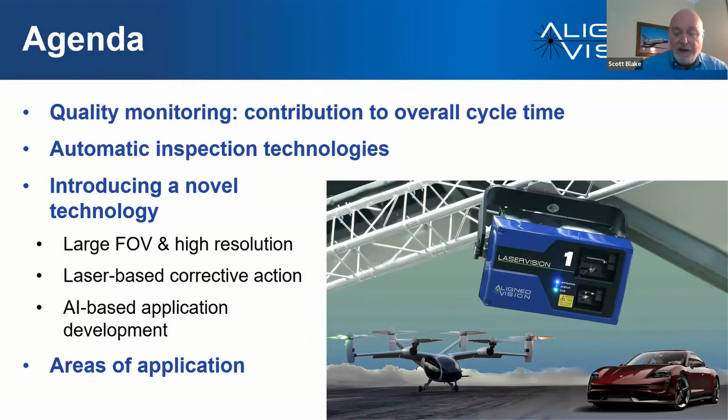Okay, good. I'm going to talk about quality monitoring and how much cycle time is involved with quality monitoring, a little bit about automatic inspection technologies in composites, and then I'll talk about what we're doing with a very large field of view and high resolution system that includes a laser projector to guide corrective actions. And the big news, especially from IMTS, is just how rapidly the ability of AI and deep learning are evolving to support these kinds of activities.

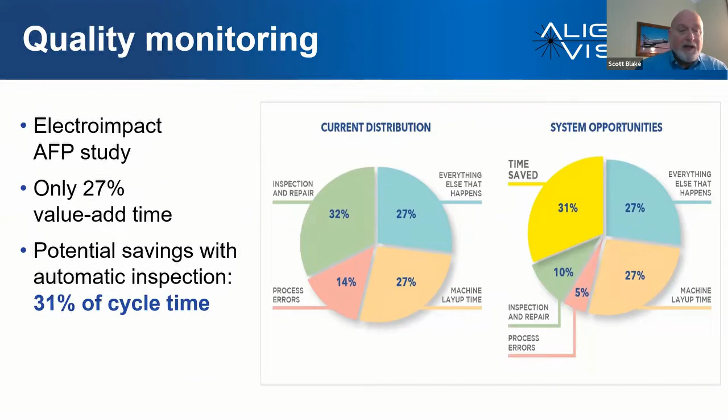Electroimpact did a study a few years ago with Boeing, and it turned out that only about a quarter of the cycle time in production was adding value. And a large portion of the non-value adding cycle time was in inspection and repair. Our goal is to bring this down as close to zero as possible. The challenges are we need really high quality inspection images in large, complex structures. We want to not disrupt production, and we want to enable rapid resolution of problems that are detected with automatic inspection.

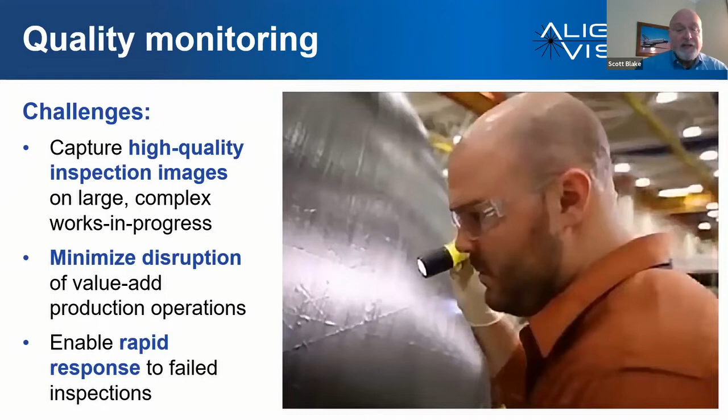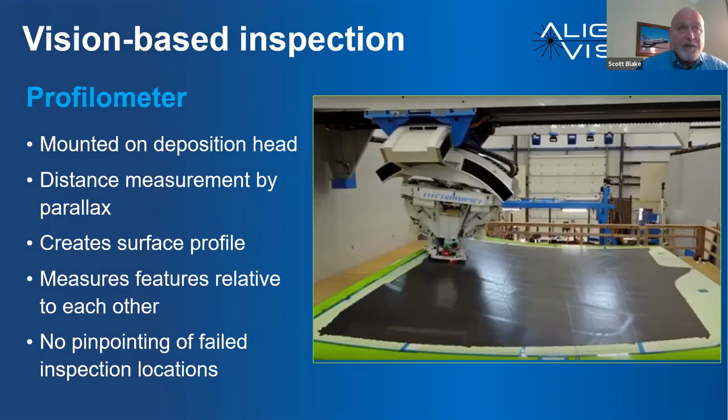Right now, the principal method of inspecting automated composites uses a profilometer, which is mounted on the deposition head. It's measuring distance to the surface by parallax and creating a surface profile. It's not doing an absolute inspection; it's looking at things relative to each other or where the deposition head is. And when a problem is found, it's often difficult to know where to go physically on the part to fix it. On our largest parts, the envelope's almost 100 feet long, and you're looking for laps or gaps or twists or missing material or incorrectly located material that can be less than 0.5 millimeter.

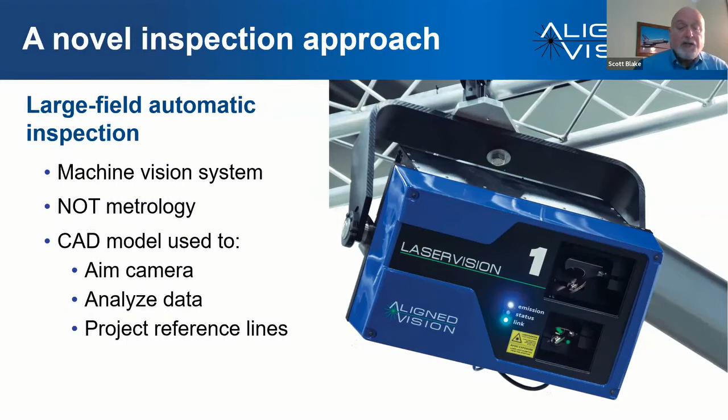What we have is this machine called LaserVision for large field automatic inspection. It's machine vision, not metrology. We are not creating point clouds. We're not using the laser for the actual analysis. We're aiming a very high resolution camera with mirrors, and that allows us to multiplex a very large field. The data that we collect comes with a photogrammetric transform, which allows us to relate each pixel in our captured image to a region on the model surface. And then after we've analyzed the images, we can project guidance with the laser projector to show where additional inspection or remediation might occur.

By doing machine vision rather than point cloud metrology, we're much, much faster than metrology. A long inspection cycle for us is about a second. And as I said before, each pixel on the 2D image is dimensioned and related to a region on the 3D model surface. We're essentially doing a gauging function. In the image on the right here, we've dropped digital calipers onto the ends of these tows, and we can tell where they are relative to each other, how wide the gaps are, all kinds of other attributes. That image is an example of a highly magnified, high resolution image that was taken from 10 feet away, and those tows are 1/2 inch wide.

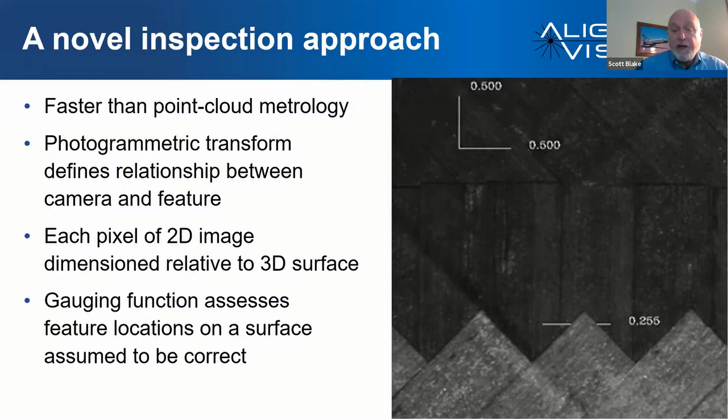On the Boeing 777X, this is an example of how our machine's used on the production of very large structures. In this case, this was a tryout wing spar. You can see one of the laser vision machines mounted at the apex of that gantry, and the pyramid shows the field of view. So we have a long standoff distance. We don't conflict with the deposition head. We can very rapidly aim the camera's field, and we have a giant lens, much bigger than you would have on a smart camera, that collects lots of light, which results in very sharp, clear, high-resolution images. And in the bottom right in this image is, once again, tows taken from 10 feet away.

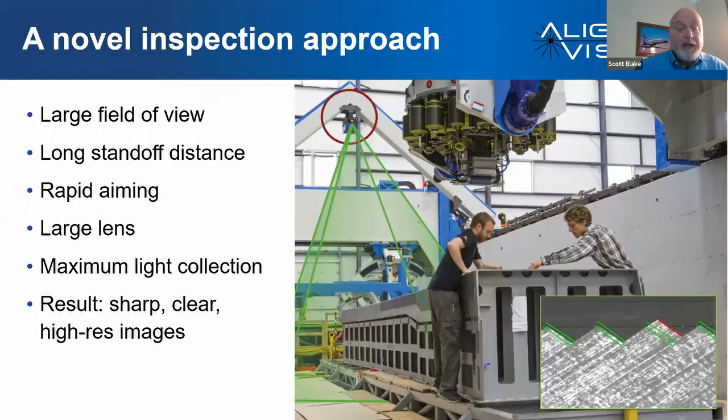The photogrammetric transform allows us to plot tolerance bands from the nominal into the as-built image to see if the starts of the course are where they're supposed to be. And when we analyze the image, if we don't find what we're looking for, we point it out, as in the third tow in from the left, and we can use the laser projector to say, hey, this tow is not right. So we're effectively providing gigapixel resolution over large fields, 2, 3, 4, 5 meters on a side.

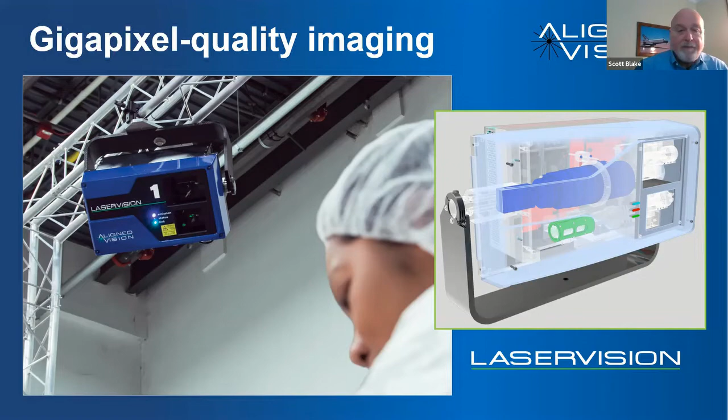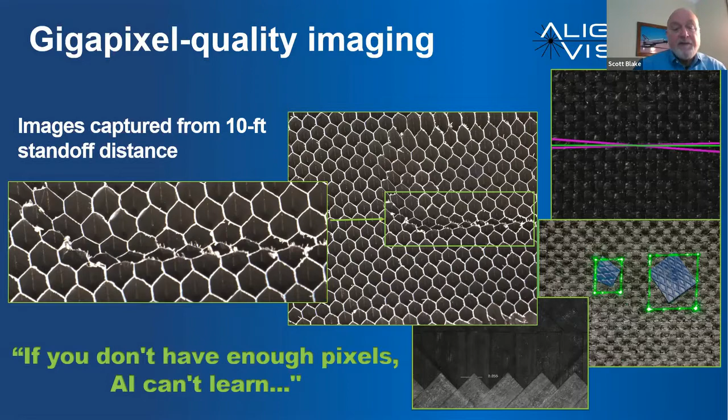We can actually create point clouds of orientations if you really wanted to look at how your material is behaving through an entire surface. The bottom picture on the right shows some FOD that we've detected in an image, and we're drawing boxes around it with our laser projector. And one of the great quotes about doing imaging, especially in large fields, is if you don't have enough pixels, AI can't learn. And we can provide images with tremendous resolution, lots of pixels in any area in a very large field.

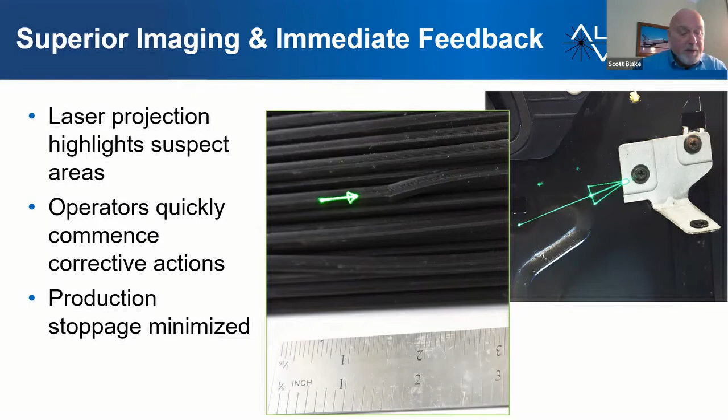As I said, each show I go to, I'm impressed at how rapidly the applicability of artificial intelligence is accelerating. We are reaching a point where analysis algorithms for any attribute can be developed very, very quickly, much faster than the old rule-based MATLAB kinds of machine vision algorithms. You capture images of good and bad things, you tag them, you treat them with a tool that develops classifiers, and you can build essentially intelligence for analysis, for automatic inspection for any kind of application.

And our system supports running these models. We develop them. We have partners who develop them. We have customers who develop them. A lot of manufacturing research facilities are associated with universities, and universities are very big on AI and deep learning. And these algorithms get put on a special kind of processor. We use an NVIDIA Jetson. It makes the analysis models agnostic, and it also avoids all the kinds of problems you have with variations in the Windows operating system.

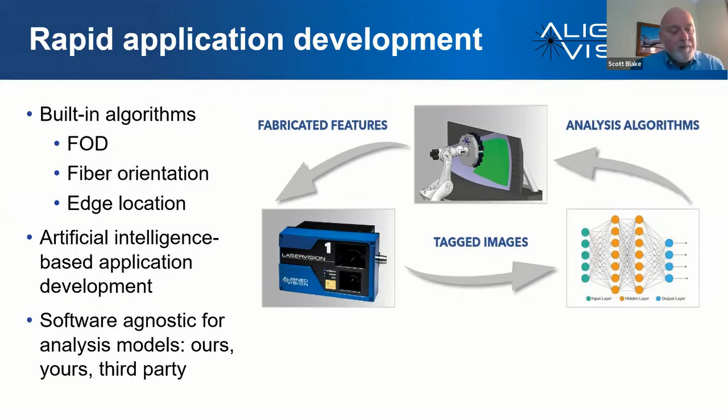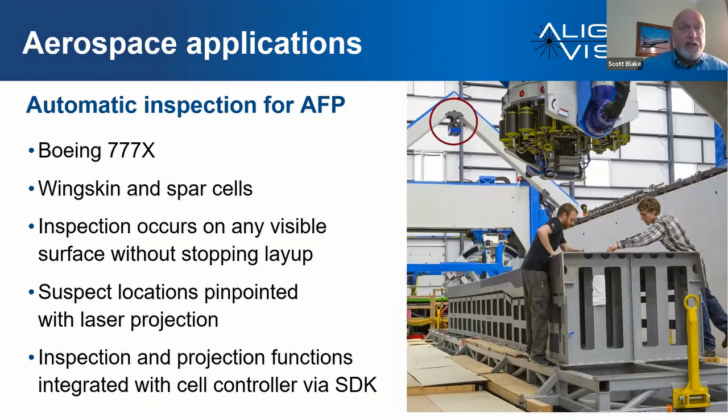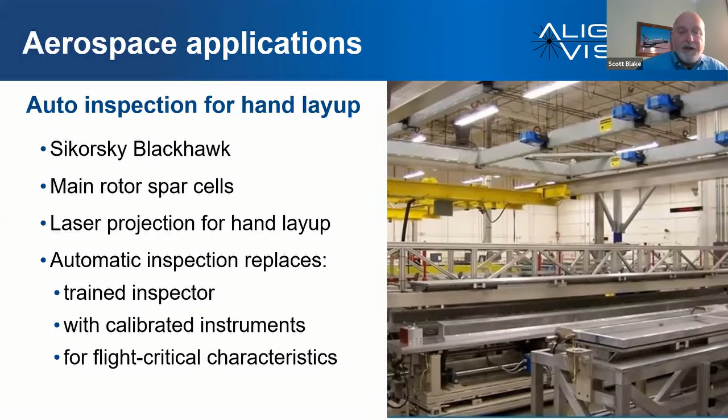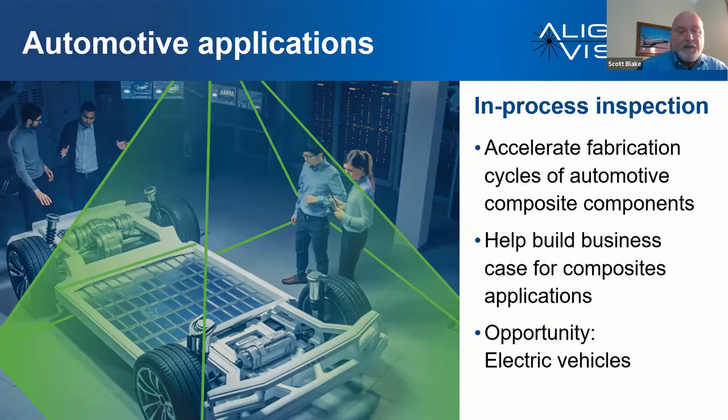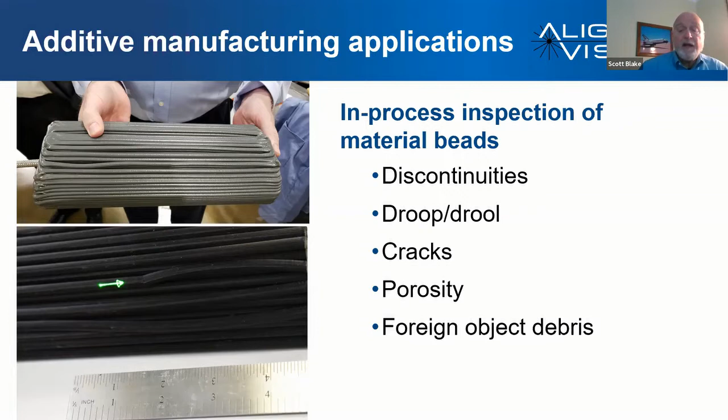Doing a lot of work in automotive, same kind of thing. We can fit most of a chassis into the field of the system. And we can even read stamped numbers on axles and things like that. We're doing a lot of work with electric vehicles and the battery trays. In additive manufacturing, we can see a lot of things that you don't see easily with metrologies, different kinds of discontinuities, droop and drool. We can sense cracks very well. Cracks are much easier to sense in images than they are in point clouds. We can look at porosity and FOD.

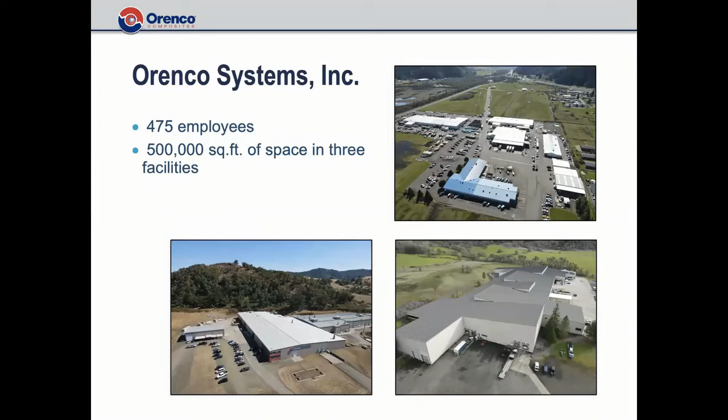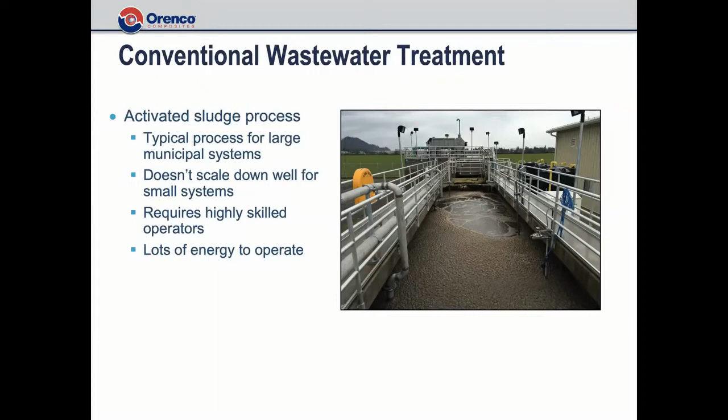So in the 1980s, Orenco pioneered the development of packed bed sand filters for small scale wastewater. And while sand filters do provide the reliable, low cost, low energy, and low maintenance solutions inherent to packed bed filters, they require significant on-site construction and land space, and repairs can be expensive, particularly if a system is abused or overloaded.

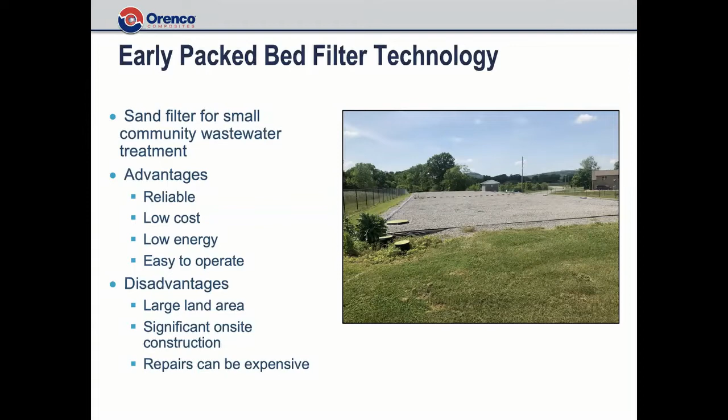So in the 1990s, Orenco developed a newer packed bed treatment technology called AdvanTex that utilizes a textile media housed in a factory-built fiberglass vessel. In addition to the inherent benefits of a packed bed filter, AdvanTex allowed for a fully assembled factory-built unit that could be dropped in the ground, minimizing on-site construction and land space, and simplifying both design and system operation and maintenance.

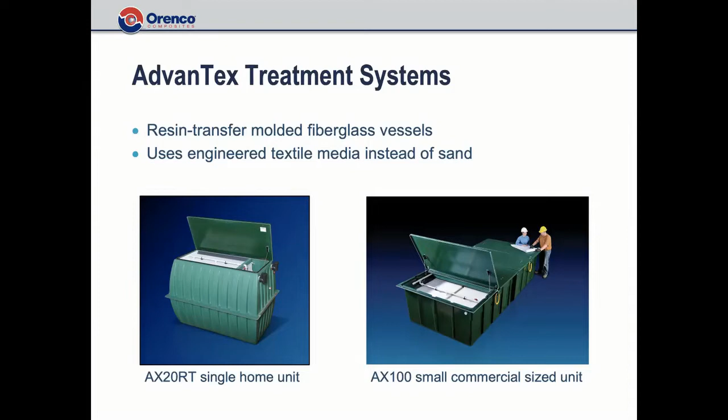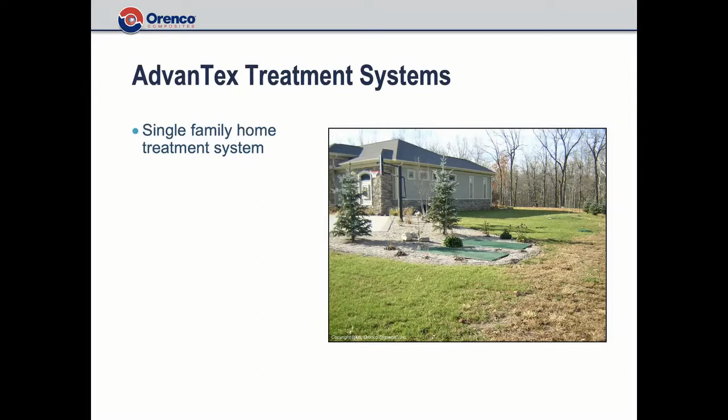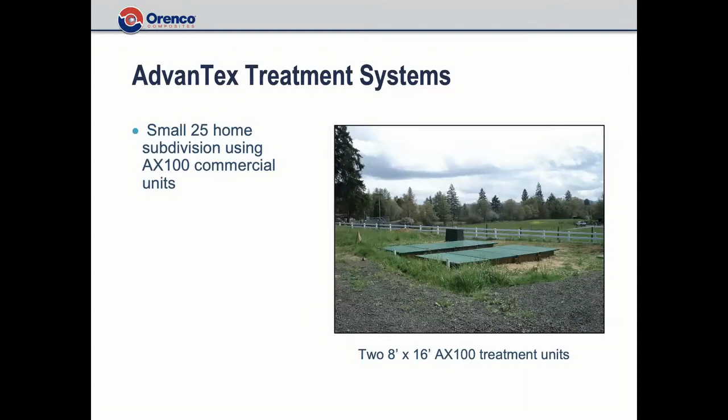Here's the larger AX100 commercial unit. This is a small subdivision, 25 homes, with 2 of these 8 by 16 foot treatment units. This RTM'd AX100 unit really limited the practical size to around 30,000 gallons per day.

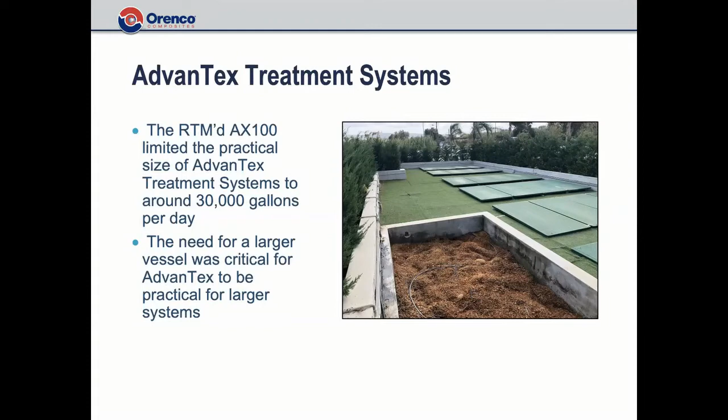So it became readily apparent to us that in order to make AdvanTex practical for much larger systems, we needed to develop much larger vessels. Fortunately, during the early 2000s, we had been developing in-house vacuum infusion capabilities, and specifically our interest was in developing foam core web stiffened structures.

We were using at the time TYCOR reinforced foam core, which I'm sure a lot of you know is not commercially available anymore. Early on, we actually developed what we felt was a stronger, better wrapped foam core rather than the TYCOR.

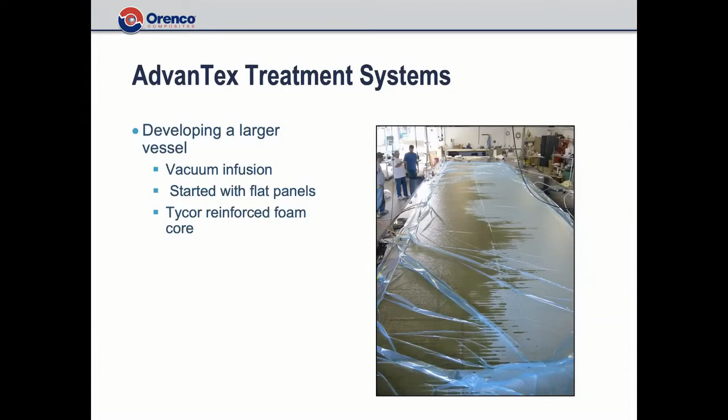So while these panel built tanks were lightweight and strong, they were really labor intensive, as you can see, involving multiple infusions and significant labor to bond these panels together.

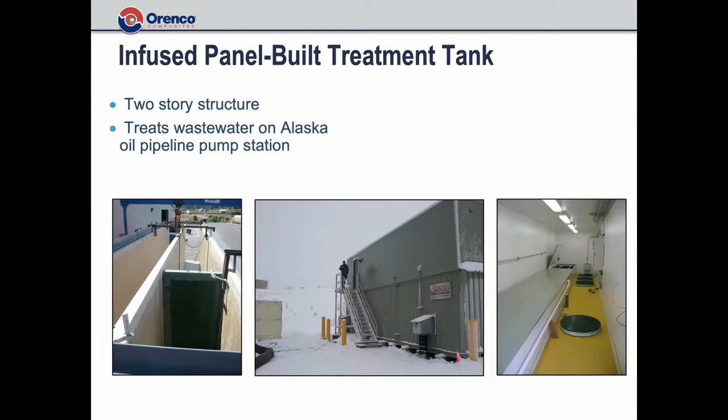Our goal was to vacuum infuse these large rectangular tanks in a single piece with no seams and no joints. It was a pretty big leap for us going from simple flat panels molded on a flat table to a full rectangular five-sided tank, so we spent some time figuring out how to infuse up a 10-foot vertical wall. Surprisingly, we found ways to do this in just a few weeks of testing.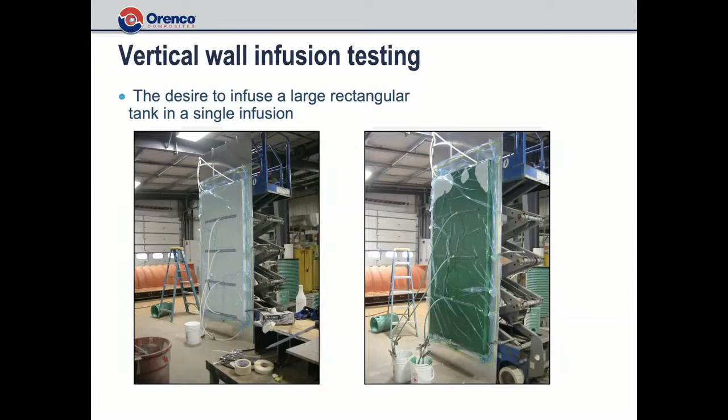You can see here on the left, we've got a panel ready to be infused with multiple injection points. We actually learned that we could infuse up to 12 feet in height with just a single injection point near the bottom.

So just in a matter of months, we were able to go from infusing flat panels to these large single-piece rectangular tanks. These large tanks enabled prefabricated turnkey Advantex treatment systems on a scale not previously attainable. These large vessels, called AX-Max treatment units, provide the quality of a factory-assembled product and fast deployment for municipal scale systems, for communities up to a few thousand people.

They also allow for system scalability, an important feature for deferring system costs as a community grows. With activated sludge, oftentimes they need to build out the system for 20 years of potential growth, whereas our Advantex systems can be scaled and built basically by adding treatment units.

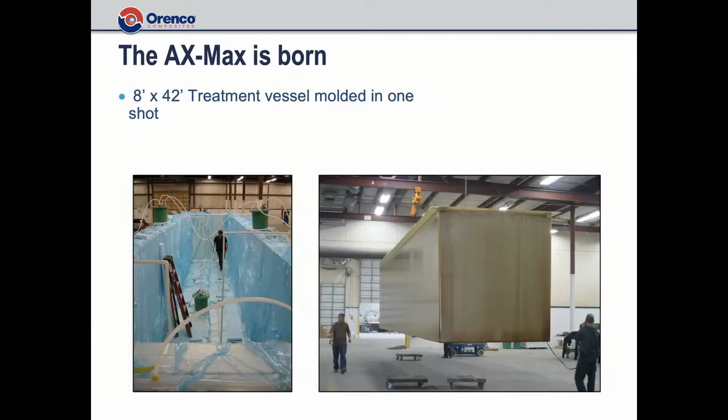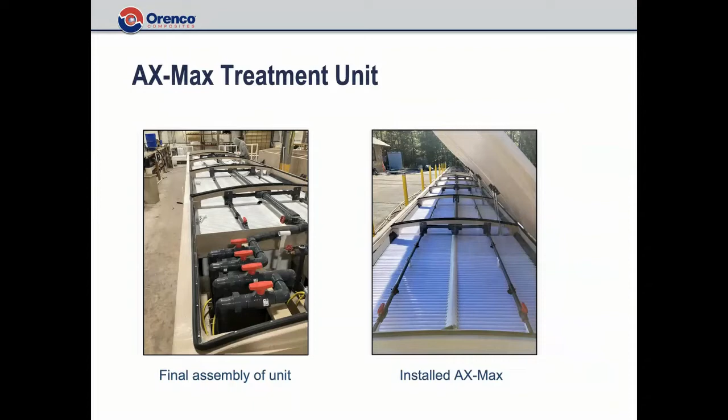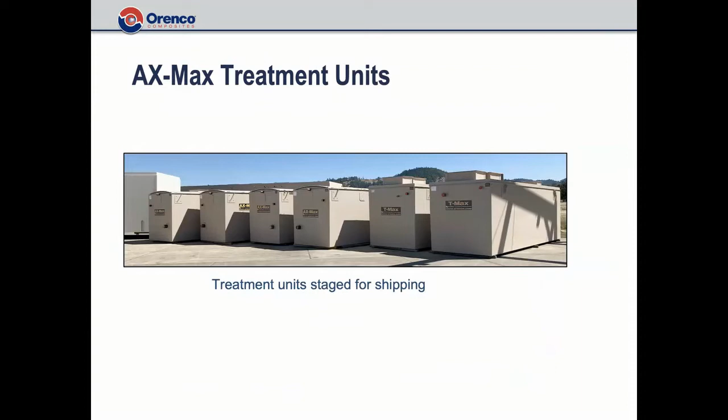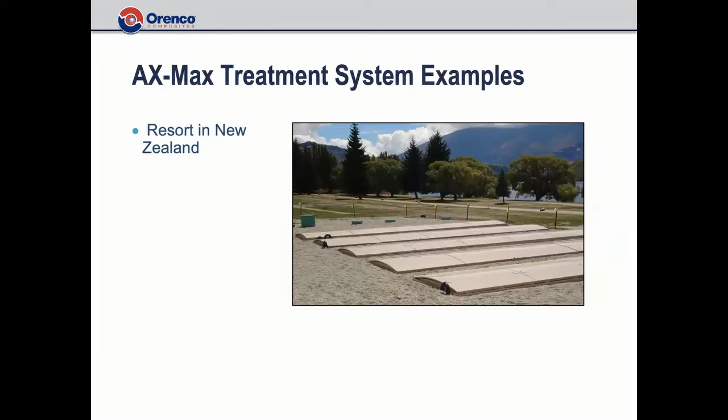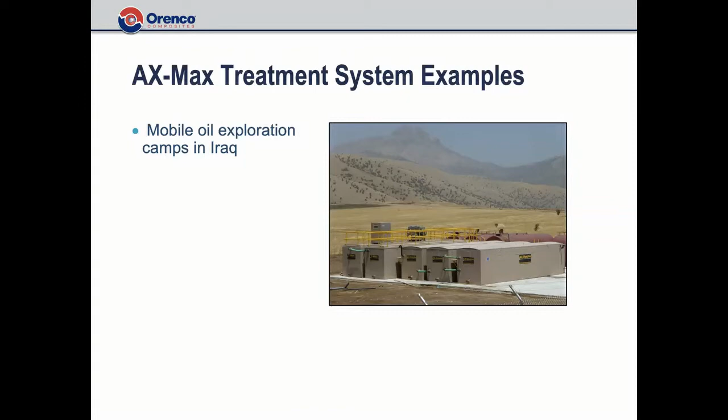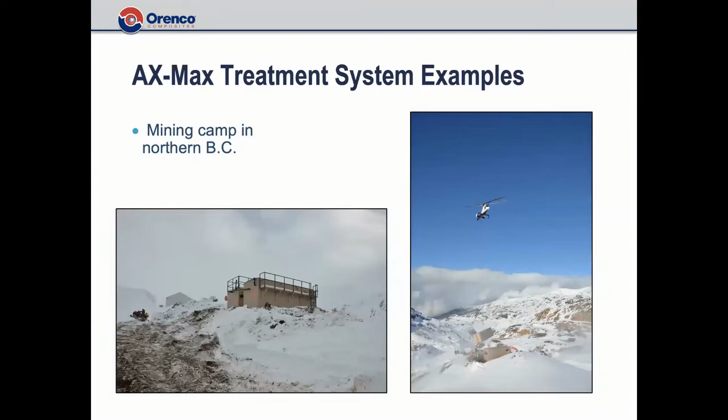With our success in vacuum infusing these large rectangular vessels, it was clear to us that there are significant opportunities and value for the use of these structures for many other applications and industries. So we now build tanks and buildings for a lot of other industries. Our largest mold right now can produce a tank or a building that's 12 feet wide, 50 feet long, and 12 feet tall. Some of these things weigh over 30,000 pounds.

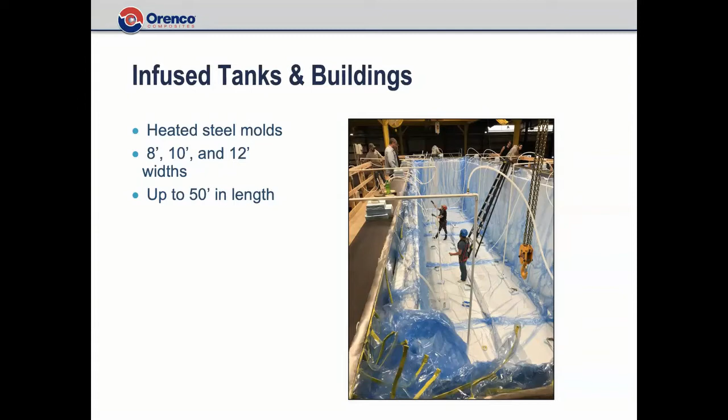This picture here on the right has 8-inch thick walls. It's a tank that's going to be completely buried underground.

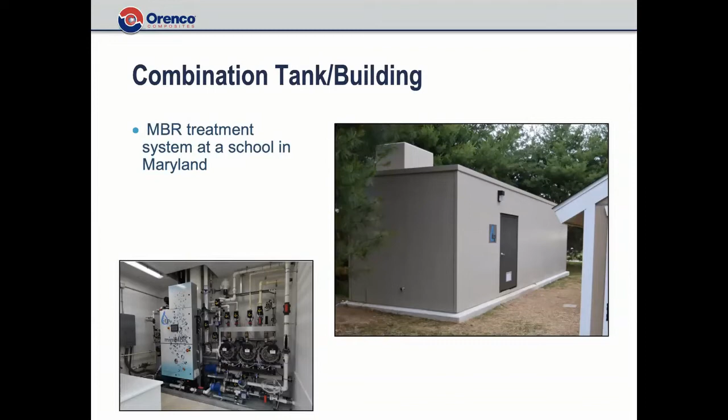Here's another kind of combination building and tankage. Again, the main structure is infused in one piece, and of course it's got control rooms and tankage and windows. This happens to be for a selenium treatment at a power plant.

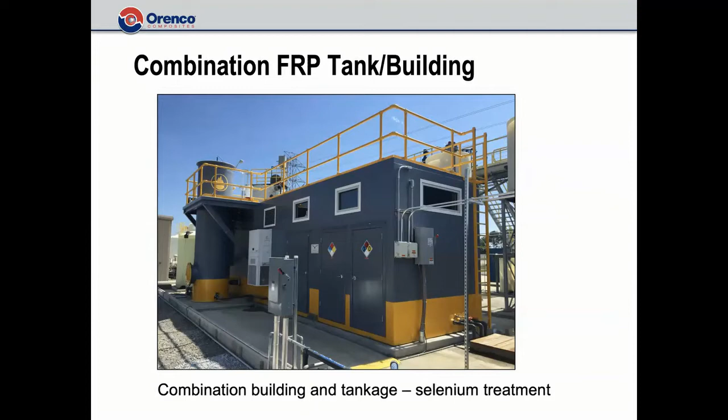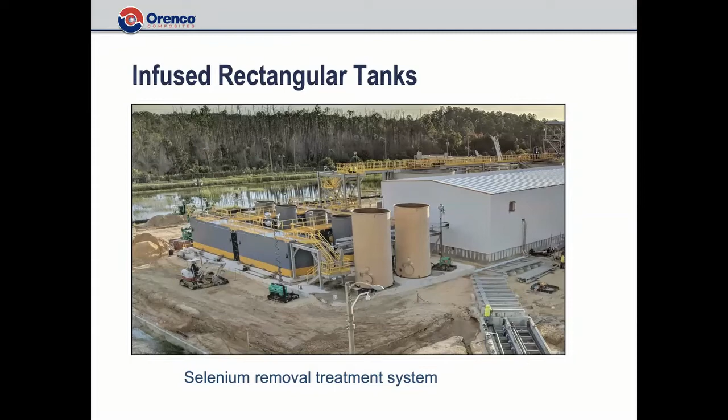Here's a much larger version of a selenium removal treatment. You can see those gray and yellow colored tanks — those are all vacuum infused structures. These happen to be filled with an activated carbon that's used in the selenium treatment system process.

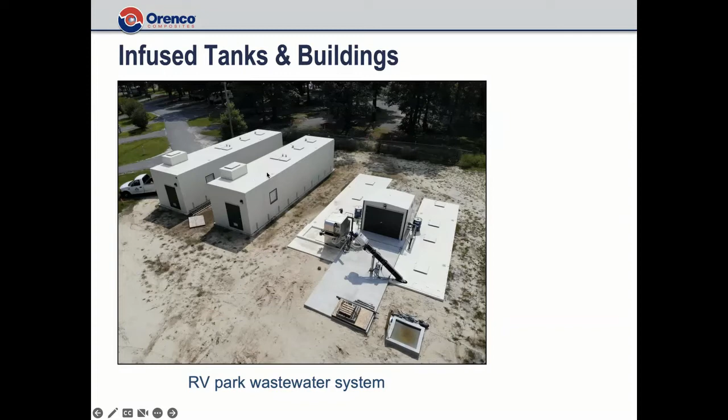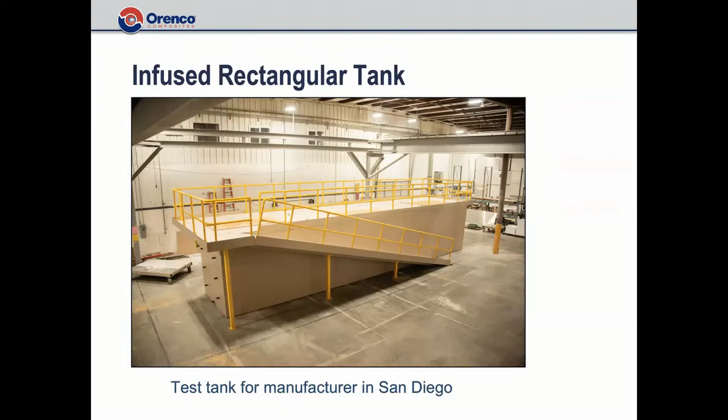Another example, this is in our factory, but it went to a manufacturer in San Diego for some sort of test tank. They take equipment and drop it down through openings into a tank of some sort of liquid. We also produce buildings the same way.

If you take one of our tanks and turn it upside down, you kind of have a building, although the bottom of the molds for buildings have a minor slope. This is a 2-room, 10 by 30 controls building. This actually went to a Frito-Lay plant.

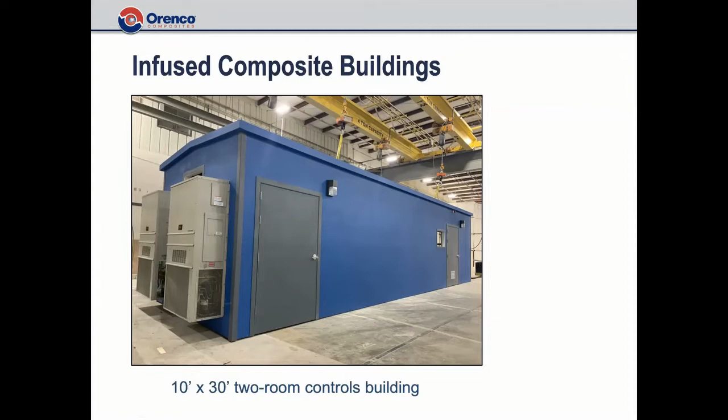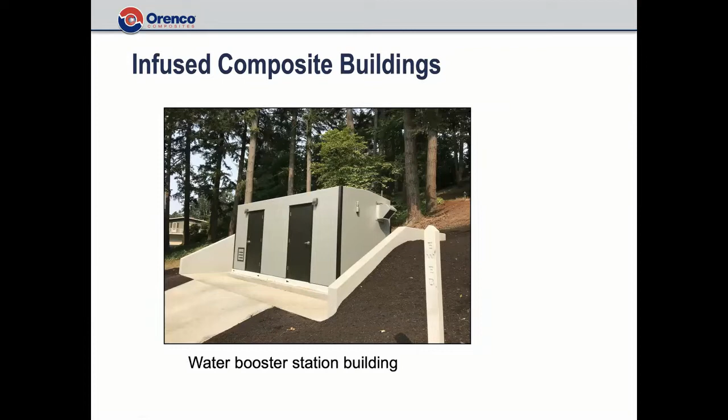Some other things we've leveraged with our web stiffened structures. This is a 105-foot diameter concrete tank we designed. It has a bunch of 10-foot wide panels, some up to 55 feet long, suspended by steel trusses.

This was a chicken processing wastewater tank, and this community kind of grew up around the outside of it. You can see beyond this tank there's an elementary playground, and this is full of chicken wastewater, and it really stunk.

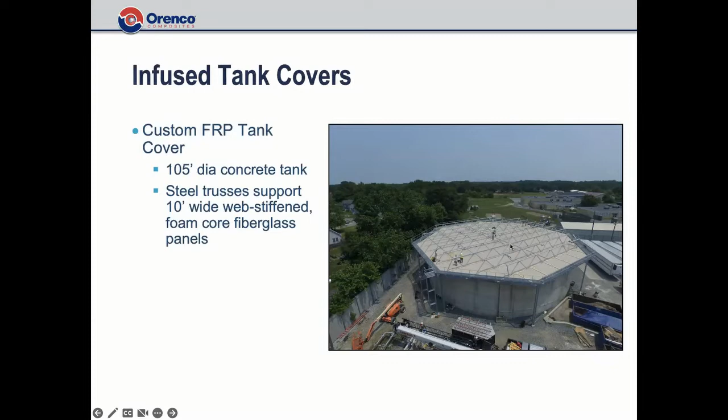We've started building vacuum infused bridges based on InfraCore technology. We have a North American license to produce bridges, lock gates, and other structures based on InfraCore technology, and there are now over 1,100 of these bridges, primarily in Europe.

Here's an example of actually a traffic bridge built on InfraCore, and here's a pedestrian bridge on the right.

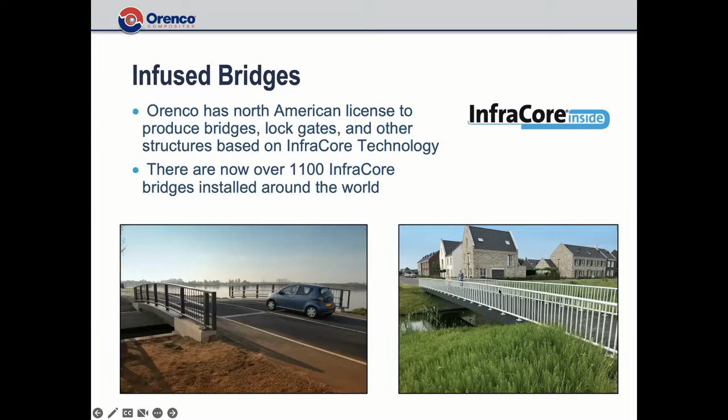Just a really brief rundown on InfraCore. It's kind of based on an I-beam concept. If you have a steel I-beam, it's optimized for strength, obviously. So with the InfraCore technology, basically we're taking glass fiber and

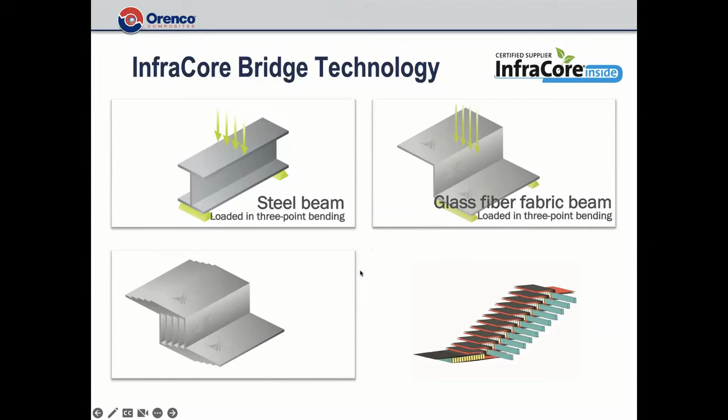putting it in the shape of a beam, but it's put together in this fashion, much different than conventional wrapped foam web stiffened technology like we use for making our tanks. The reason this is so important is that it gives a robust sandwich structure that's damage tolerant and prevents crack propagation.

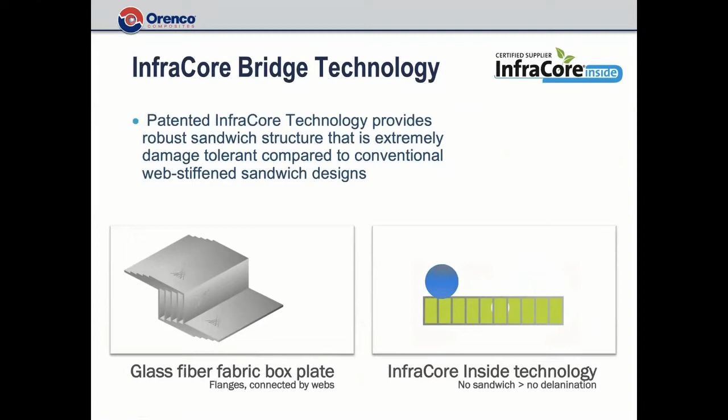The last couple of things: we've actually converted a lot of our resin transfer molded parts to a DCPD reaction injection molding process. This is an example of a tank. It's molded in 2 halves and then bonded together.

This is one of our high volume wastewater pumping systems for collection systems. We do both collection and treatment. We've just been talking about treatment vessels, but we also do a lot for pressure sewer pumping systems.

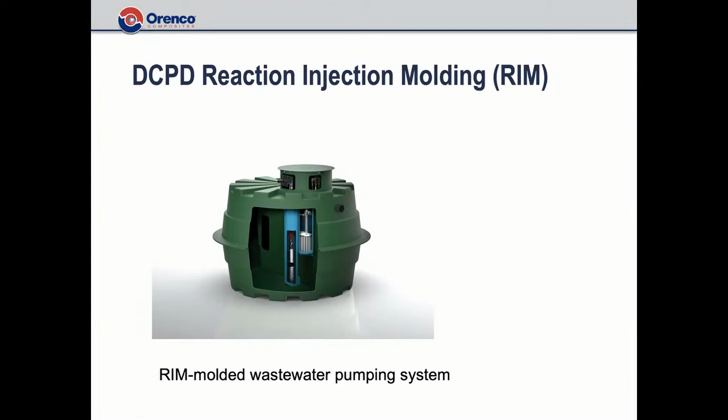Here's an example of one of our aluminum molds in a horizontal press. This particular part is a 185-pound part. It's injected in about 50 seconds with about a 10-minute button cycle time.

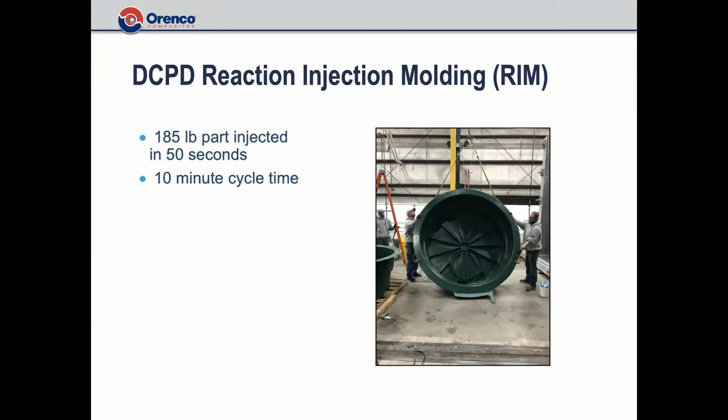And that's it for my presentation. Like Dale said, I'd be happy to take any questions.

Thanks, Eric. None, we'll see if one comes up during our little Q&A here that you and I'll have.

What kind of resin system? I know DCPD is an unreinforced system, but for the fiberglass reinforced systems, is that mostly vinyl ester for corrosion resistant purposes, or are there other resin systems you're using?

So we use isophthalic resin primarily for most of the water and wastewater applications. We've done a lot of C581 testing to show it's more than adequate for most municipal wastewater. However, a lot of the systems we do, like the selenium treatment tanks you saw, those are all vinyl ester. So we do use vinyl ester for a lot of industrial applications.

What's the highest temperature any of these see? Some of the vinyl ester tanks may get up to 200 degrees Fahrenheit, usually not on a continual basis though. Most municipal wastewater systems won't see over 100 degrees Fahrenheit. The bugs in the treatment system will fail miserably if it gets too hot.

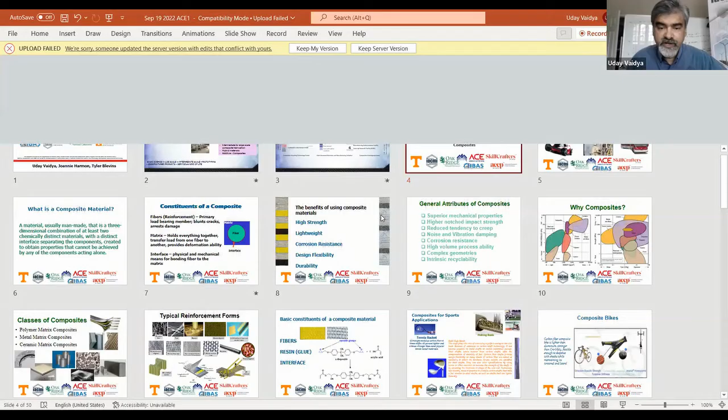We also go over IACMI as an institute with the participants and generally get them oriented about what to expect. The workshops that we run typically serve anywhere from 25 to 40 participants. These are students from community colleges, even high schools, as well as college students, and teachers, some of whom take the information back to their schools and implement it in their classrooms in their personalized settings. So that's really the background of ACE.

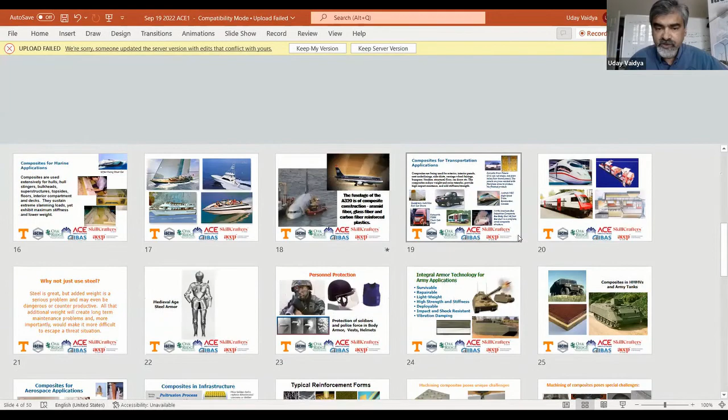So this mission has also been spread across the country. We are working closely with the New York, Long Island facility with Phil Rugail and his group, a lot of schools between Florida, Minnesota, as well as throughout the country, as well as doing workshops in-house at the University of Tennessee. So we ran this recent workshop in July, just a month or two ago.

And let me first mention, the activity was tied to building a composite drone. So you probably know there's a whole variety of drones, all the way from small do-it-yourself kits all the way to large ones. We want to do something manageable for the students.

So we had started with a basic idea with a quadcopter, which would require them to design the entire base structure completely personalized to their imagination, as well as go with different ways of building the cover, as well as the unit that carries the camera. Everybody had standard blades that they used, but the rest of the structure was fully customized, and the electronics was common across the group. So this was a 5-day activity.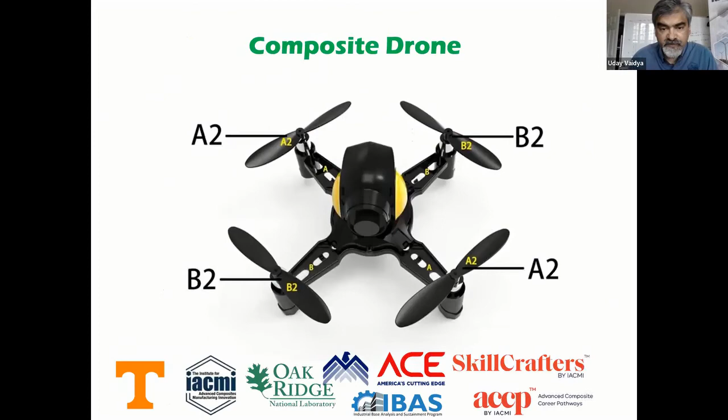So these are some examples to give you an idea how it went. So this is the session where the grad student Kaustubh is going over Fusion 360 and the philosophy, how to design. And the participants actually had their own computers, which they were able to quickly practice on and then come up with their own designs. All this was on day 1.

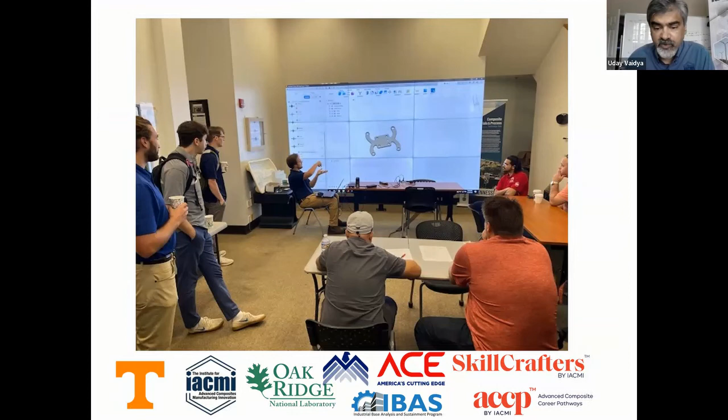On day 2, they sat as a group and collectively evaluated each other's design of the base. And each group had very different ideas about how their base would be. And this is kind of their interactive network of exchanging ideas and thoughts about how it would work or may have some challenges and so on. So interactive input of design is a key point in any engineering application.

Then after this are examples of parts they made. They actually produced plates like these. This is a compression molded plate. This is an extrusion compression molded plate. This is a vacuum infused plate. And they took it through the machining operations. And you can see that each of these is a different design from each team. And many of them had weight savings through slots and holes and other things. So very creative designs.

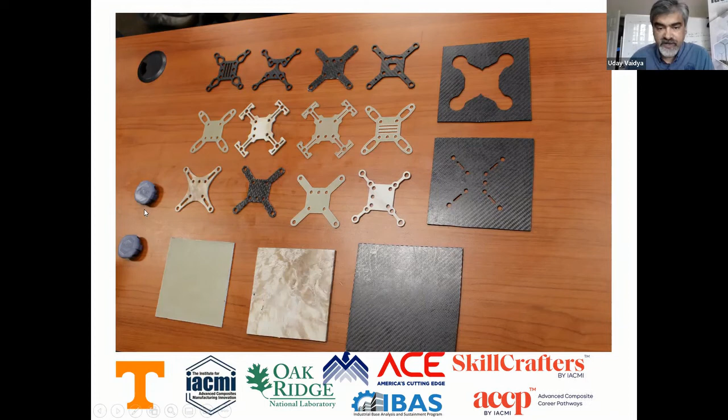And the caps that they made. So the caps themselves were produced by additive manufacturing. This is where they got exposure to creating CAD files and then printing with either ABS or nylon. But each group made their own caps this way.

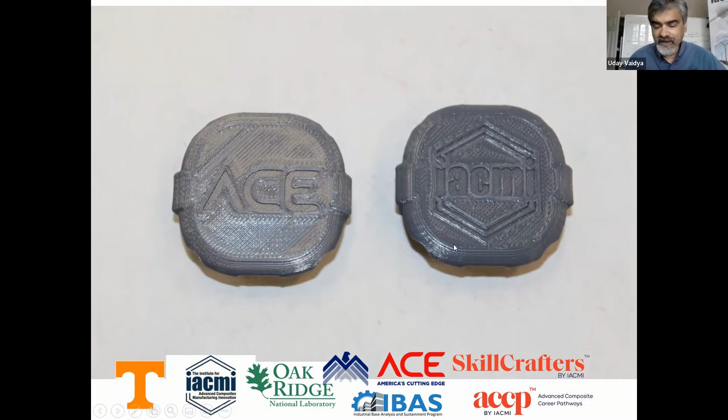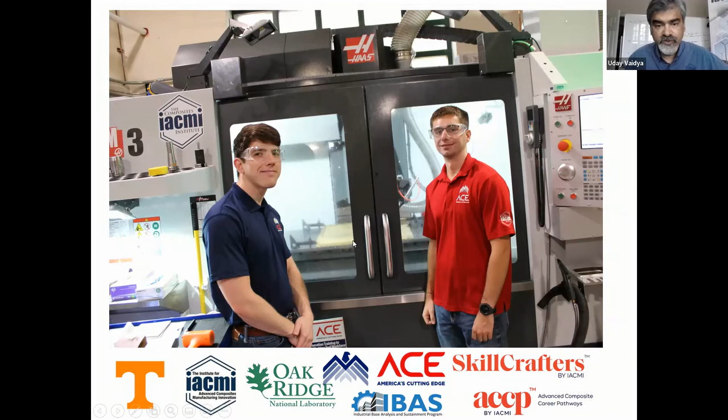And then machining itself, we have a Haas VM3 as part of the ACE program. So this is John and Will, who are actually, again, senior undergrads who mentored the participants on machining each of their plates into the designs that I just showed you. All this was achieved on days 3 and 4.

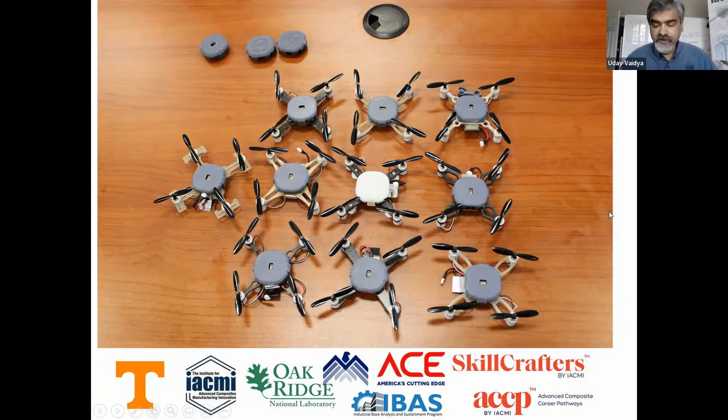At the end, each of these folks build their own individualized drones, if you will. And these are examples of the kits that got assembled at the end with the caps, printed caps, whatever method they used to produce the base, assembled. So every single one actually flew. And there was a competition. I think Mark has a LinkedIn post with the video here. I'm sorry, I didn't catch the video this morning.

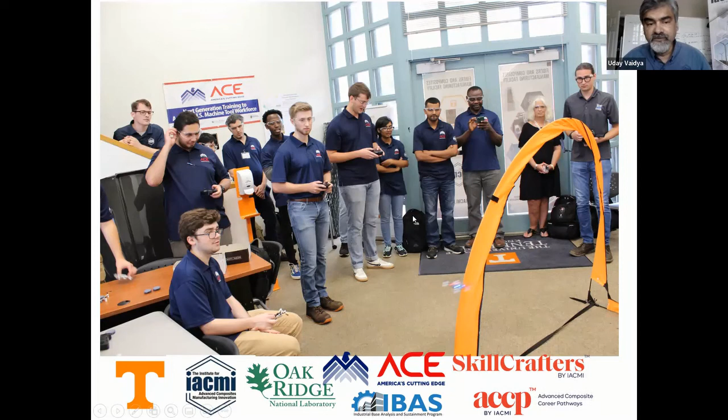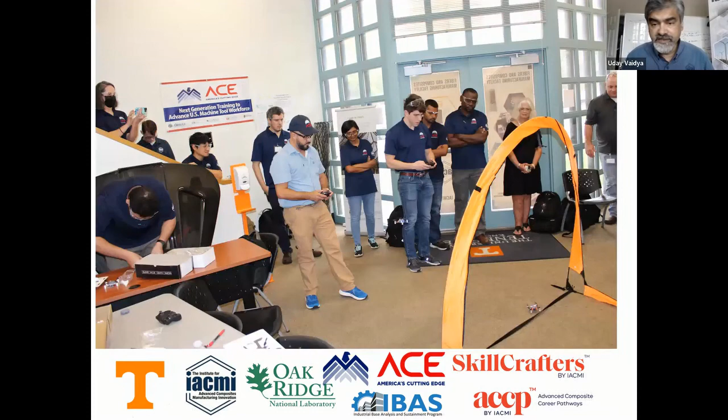But very interesting, we had this as the torture path for them to cross. So they had to go round and round this like 10 times to show that their design was robust and actually functional and followed the intended path. So this was a competition mode, like a college basketball shootout, if you will. And I would say they did fantastic. So these are just examples of that. This is a whole team for this workshop. And I'm giving you one example of many such activities that our team has conducted.

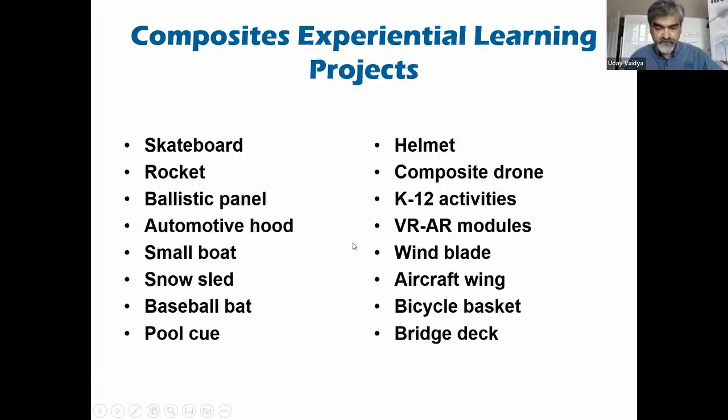But where do you go from here? What would be the next fun thing to do? Sure. So this activity was a 5-day activity. Obviously, in a given semester, 5 days is too long. So we're obviously looking at making a 2-day, like a weekend activity of this, where everything we did here could be easily accomplished, like a Friday, Saturday, or a Saturday, Sunday. And therefore, the dissemination could be very widespread across high schools and community colleges. That's one of the things.

All these activities have been compiled into a book as well, so people can take advantage of that and get information from there. But we just have to grow the knowledge base and get people excited about composites, right? I mean, there's not a standard curriculum which goes into everything I've said here. But in this way, you learned about materials, machining, manufacturing, product design, assembly, electronics, the whole thing, right? It looks like it's a small part, but all these fields came together for their assembly and integration.

So, yeah, I know Mark Morrison is on. I don't know if he could pop in. I don't know if that video is available on our website or on a LinkedIn site. It is on LinkedIn. I can pull it up and send it to you to share with the team.